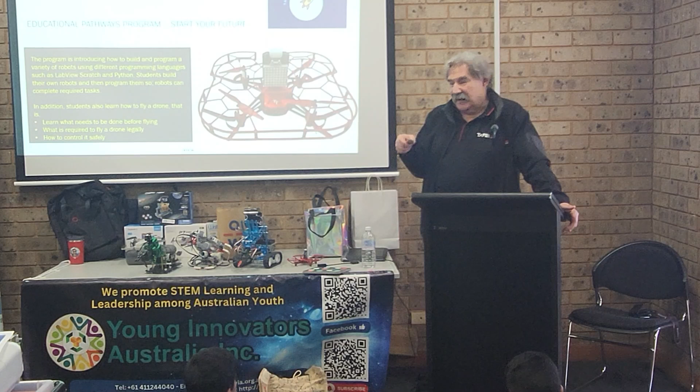You have to remember that if you want to fly a drone, you have to do that in a safe way. To fly a drone outside a safe area, you have to be 15 years old or older. But before that, you can fly a drone in a locked room where it is not possible to do any kind of harm to other people. So please remember, that is what is indicated there.

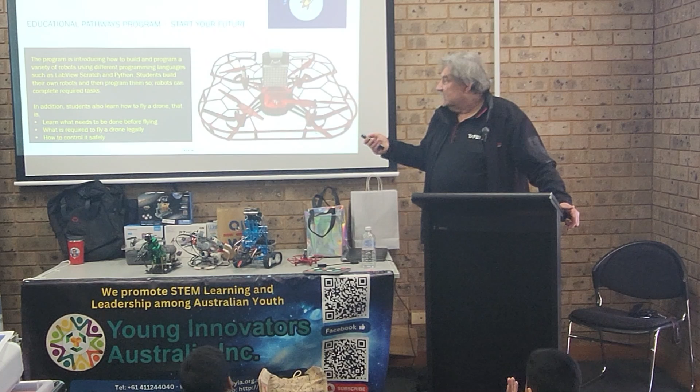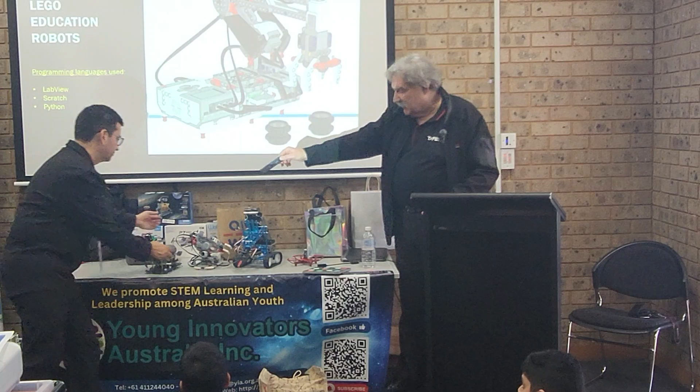Okay, so now let's look at the robots. You remember that one, yes? So we've got that one. Students were building, well, at this stage our program started 3 weeks ago, so all these robots which we've got here are still not completed because students are building them. At this stage it is kind of advanced, so you can see it's a bit of work. Students like Nora put them there, you can look and feel them later.

But you saw the building process is the same, only you need to spend extra time. That's why we have longer programs. So once students are completing building, they will program that.

We asked, what is this? A grabber, it looks like a crane. Yes, so this building is like an arm which is picking up the logs and things like that. So all of them are doing exactly the same thing, but there are different technologies.

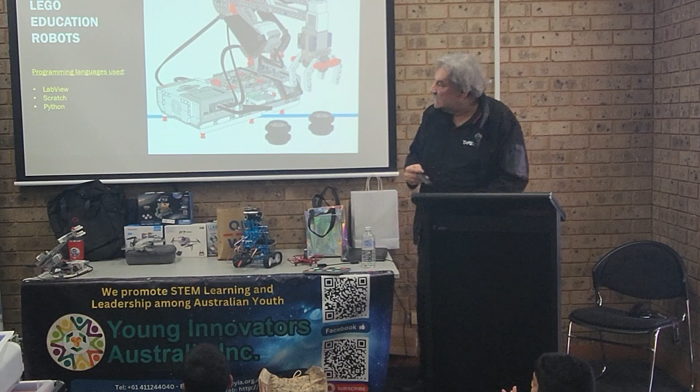If you look in a corner, we'll come to that in a moment, you can see the programming languages. At this stage, you are using LabVIEW, so you are using blocks and putting them together.

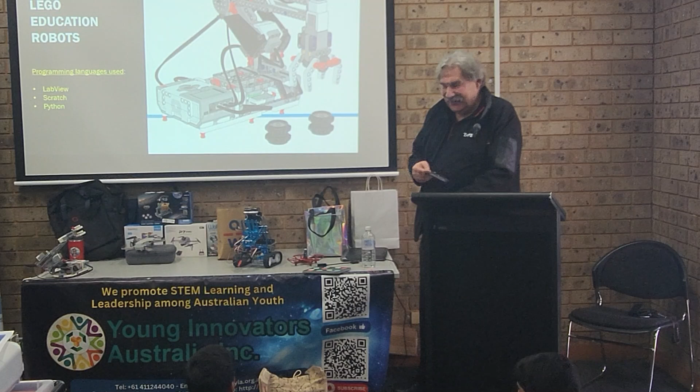Now, do you also use Scratch? Yes. So you are already very advanced, already on the second one. Scratch is something you can use with those devices, so this one and that one can be programmed with Scratch. If you are not using LabVIEW, Scratch is the next best thing because you've got pictures, you put them next to each other, and then you change the numbers.

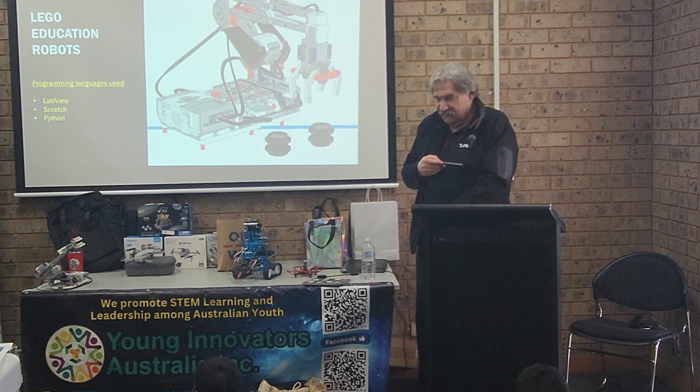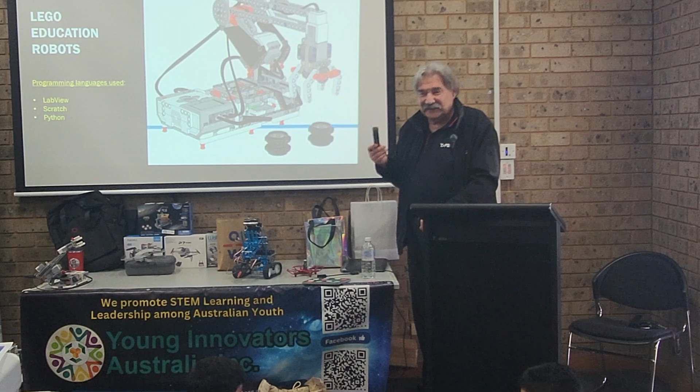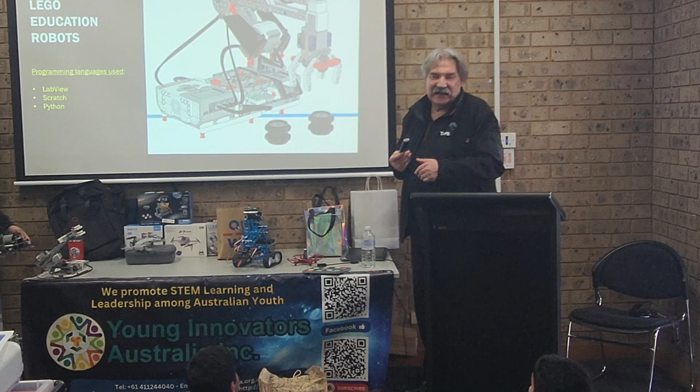And when you finish your programming, does it work always correctly? No, the programming is terrible. You always have to think what to do with it. So please remember, regardless of what programming language you are using, you think everything is perfect and will work, but then it turns out it's not actually working. The process is the same: you program, you try, you test, and then hopefully it works at some stage. The more you do this kind of work, the better the results, and you'll learn faster if you've got a background in that area.

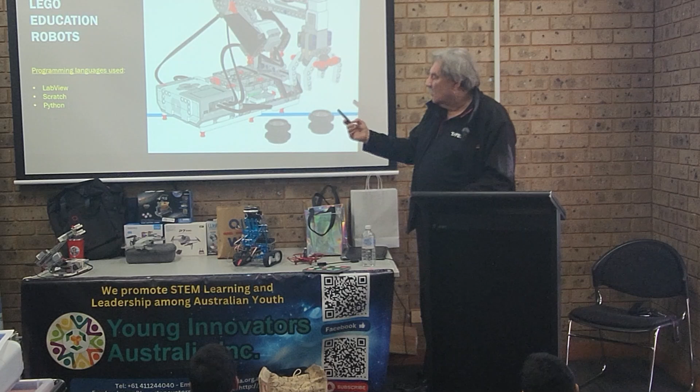Okay, so that's this one which we've got here. Our students are starting with this one, and then they go to the next one. When they finish, they go to that one.

Did you use a laser as well? Sorry, if you want to use a laser pointer, yes. Did you use that one as well?

Did you build that robot? No, not yet. Oh, you will, that's why he's just waiting for you. You will see that, that is a bit more advanced.

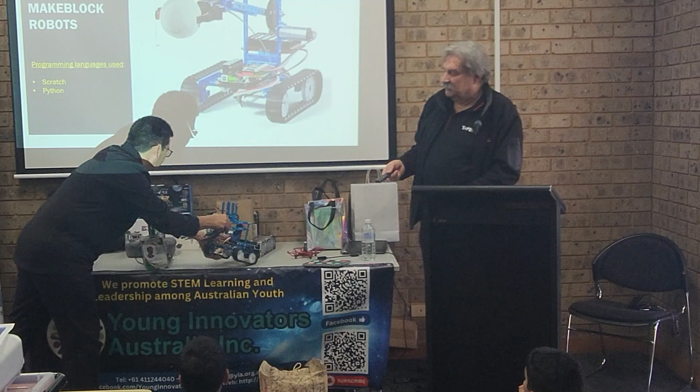I noticed that you've got one in the corner there, but that is the next robot, which is built by the students, by the way. Their prizes, the winners will get those, so that's the prizes. In this case, you can actually have one today. So that is the result of what students are building.

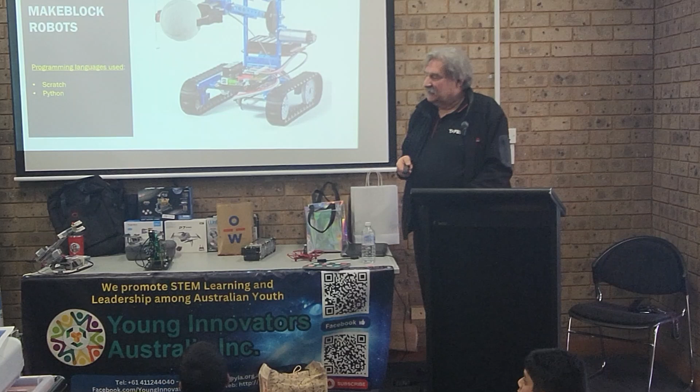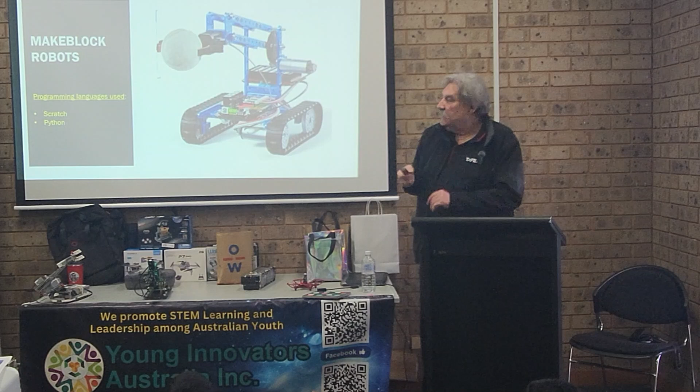So again, it is like a crane, it's got an arm, it is a robotic arm. This robotic arm can do a lot of interesting things. But please remember, that one was also a robotic arm from Lego. This one is a new technology, and it is also a sort of robotic arm.

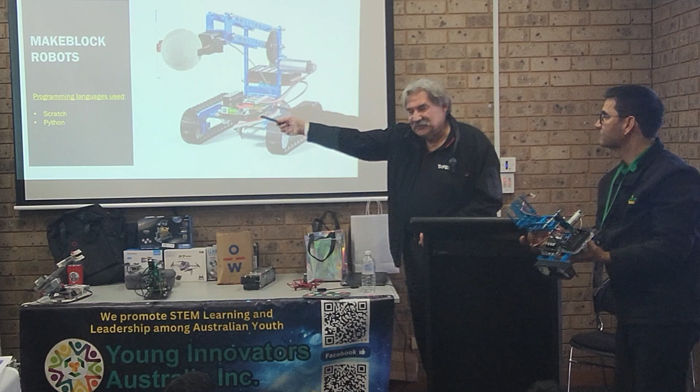Now, if you look at the programming language, you are ready to work with that one as well because you know Scratch. Yes, we know Scratch. So in this case, you can go to that one and program that as well. It is a bit harder to build, but that's something you also have to learn, something a bit more advanced.

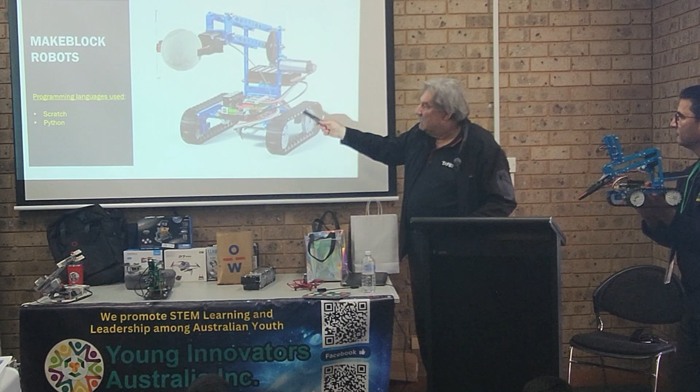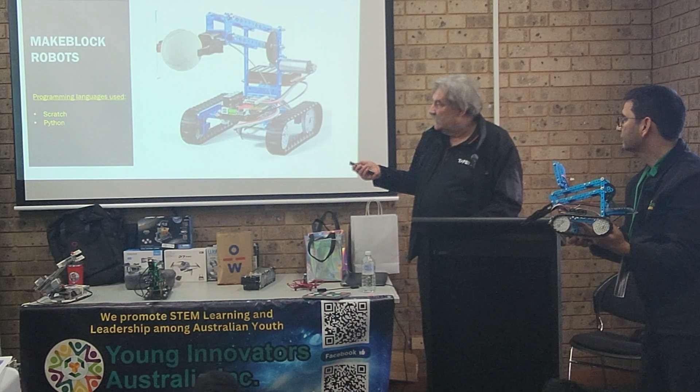More like a Mars rover, these kind of trenches and all. Yes, so you still have to learn how to build them, but you also have to learn how to program them. Exciting. So this one is more advanced, and that is what our students are doing after finishing with the Lego one. So they go to the next one, and the next one is this one.

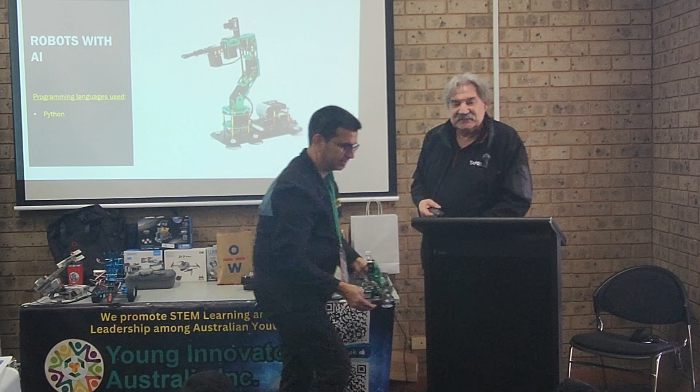But this one, you still have to build, but this one is smart. That robot is actually learning as well. So when you program that, the robot is actually memorizing everything. Do you know what AI stands for? Artificial intelligence. Great, very good, artificial intelligence. So what does that mean? What is a robot with artificial intelligence able to do?

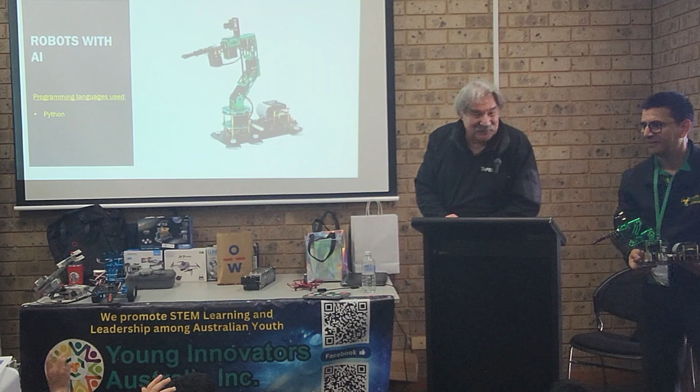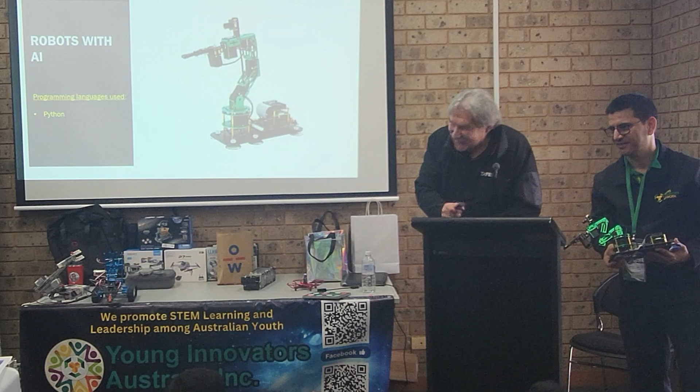Anything? Yes, we hope that will be anything. It is able to learn while it's creating stuff and do things. Exactly, evolving with humans. Yes, spot on, we will have to have a prize for that. Okay, we'll do that, he's already getting one.

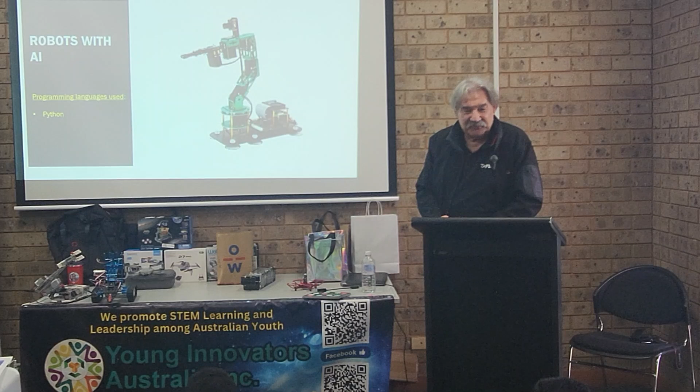So this robot is very smart. You will teach this robot to do something, and the robot will know straight away. This robot is also able to learn what you mean by moving hands, making gestures. This robot is actually learning everything. So if you do something wrong, the robot will tell you. Yes, the robot is actually very capable.

So this one is much more advanced, and if you want to program this robot, you have to use a programming language called Python. Do you know what Python is? Yeah. You have to write what the robot does. Yes, that's right. But what's the difference between Scratch and Python? I think you have to type the code, and Scratch is block building.

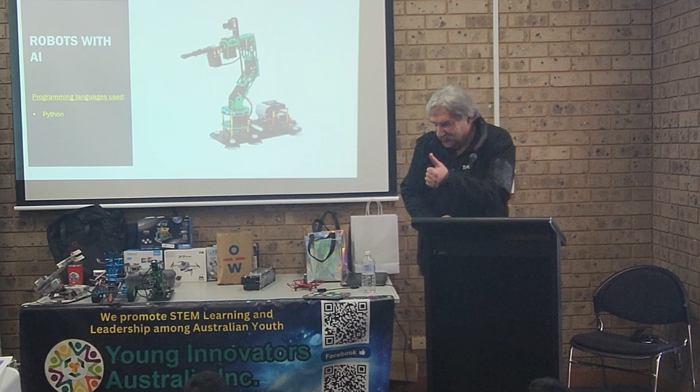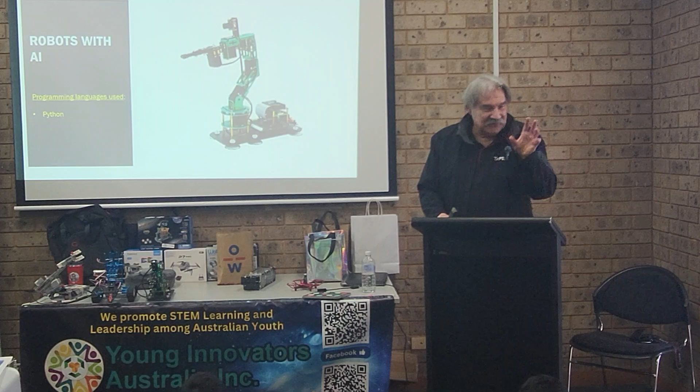Very good. Yes, so in Scratch, you use blocks, and these blocks are already predefined, and they will help you with your learning. But in Python, you have to write everything by yourself. Yes, as you said, you have to actually type everything by yourself.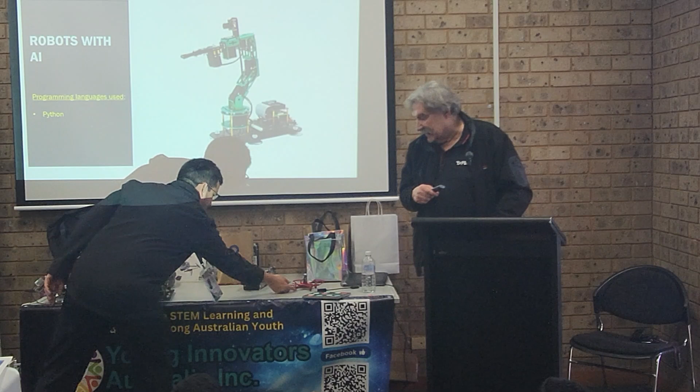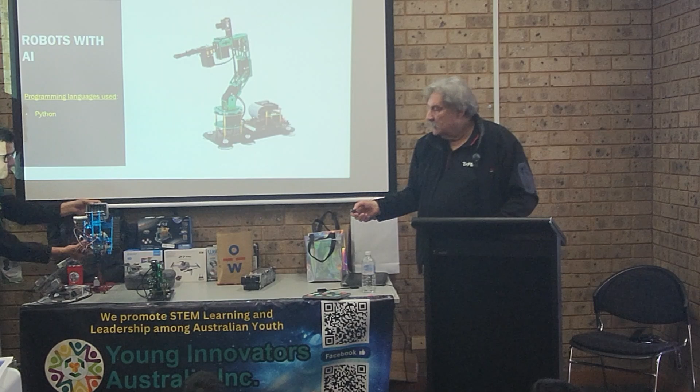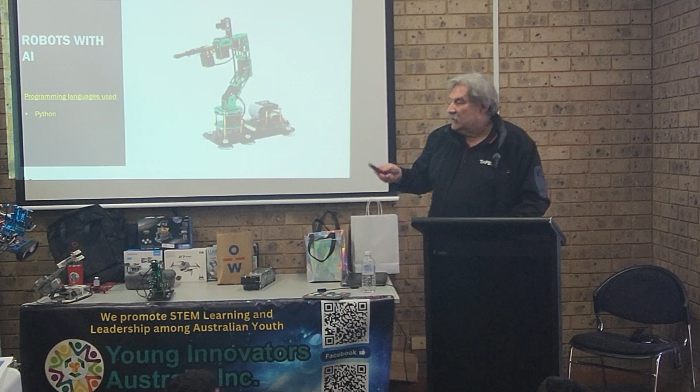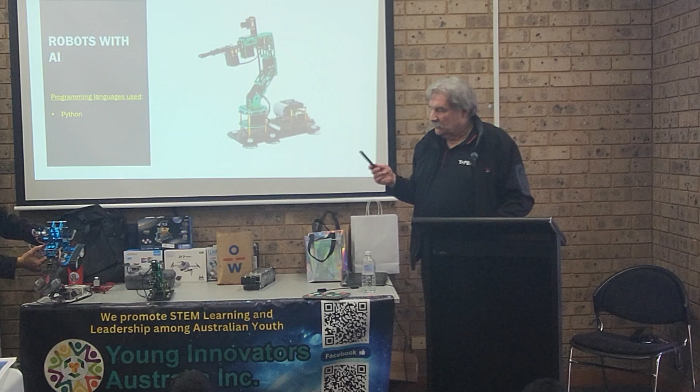Now, please remember that when you are using this blue one, the blue robot, this one which we had before, or we can look at that here, the program that you will be using, you can create that in Scratch, and you press a button, and that will convert automatically into Python. So in this case, you will learn very quickly about Python if you are using this blue one, because it will help you switch to Python.

Well, okay, so now I wanted you to remember that each of them is actually doing the same thing. It is a robotic arm. Yes, but now you can see that you are learning.

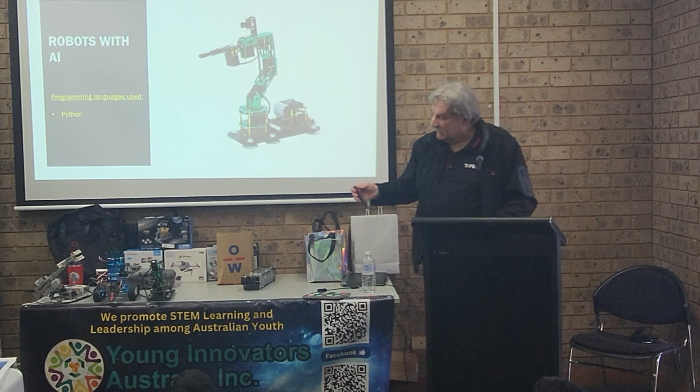And what's the purpose of that? What's the final result of that? Well, it is this. And that is what's happening, that is in real life. And to actually program that, you can see it's exactly the same robotic arm, but it's actually a worker in an organization. And these days, those workers are everywhere, moving in different ways.

So someone has to program them. That is why you are learning that, because when you finish, you will go to work, and you will be programming them. You will be checking whether they're working correctly, whether you need to make some changes, because as a programmer, you know you could make mistakes, yes? And what will happen if you make a mistake?

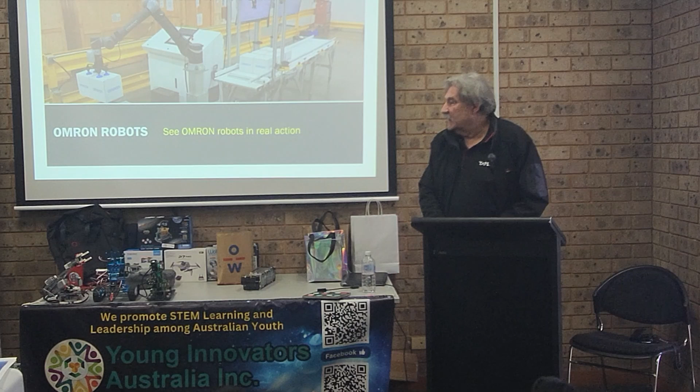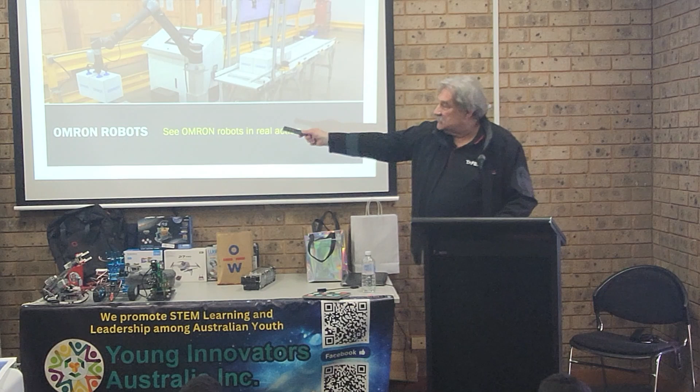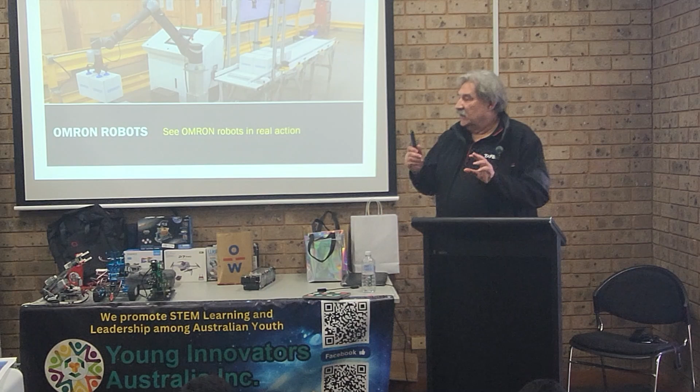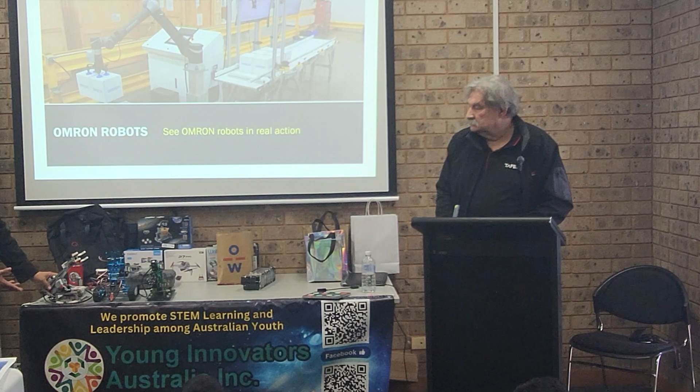Yes, it's very important because today you will learn, tomorrow you will do. Even the old engineers, they don't build an arm like this, they start like this. When this works, then they think about it, because they can't take a risk and make like this, and if it doesn't work, we are all in trouble. So they start small. What you learn today is where the engineers start too. Yes, so now you can see your path, how you started from Lego and end up here working as a programmer, programming robots.

Now, I also mentioned that you may be programming drones as well. So this drone which you can see is programmable. You can program this drone using either Scratch or Python. Now you can see that here you have got the pads.

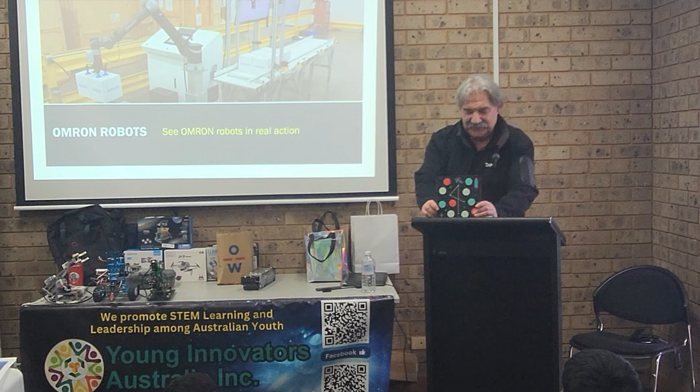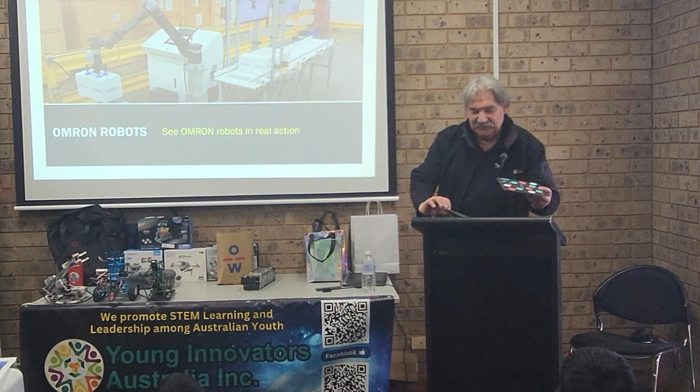How do you see? And do you see that they are different? Yes, and that is what the robot, the drone, is able to recognize. So when it sees a specific pad, you can assign an action. So if you see this pad, you will say keep away from that, and if you see this pad, you can say land on it.

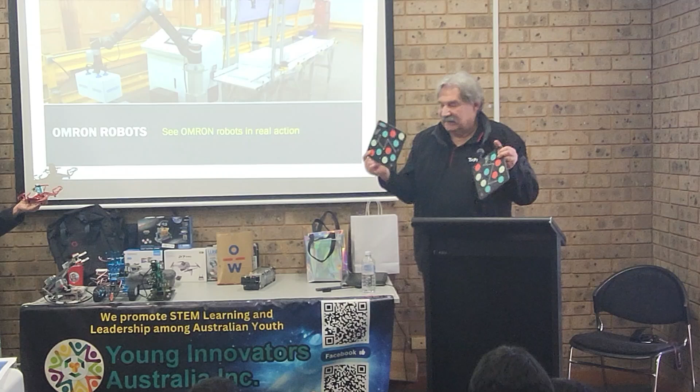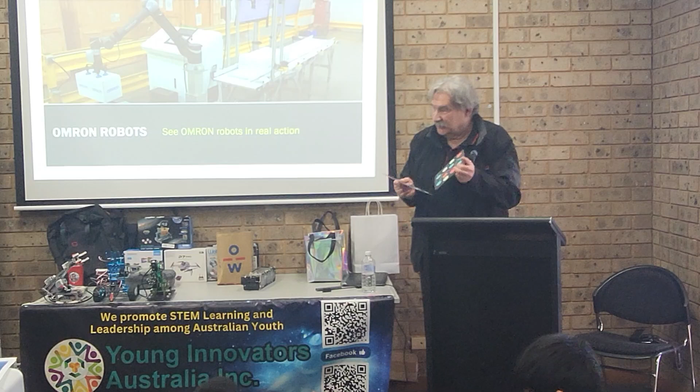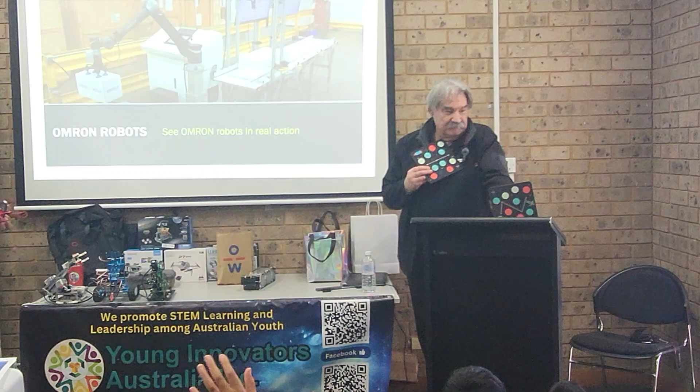So please remember, these pads are designed to give the robot an indication of what action it's supposed to take, or what action you will assign to it. It's got a camera which checks what is below it. So you put the pads, and one pad could be, for example, fire. So if the drone sees fire, what is it supposed to do? Go away, stay away, fly away. Yes, fly away, or something better. Stop the fire? No.

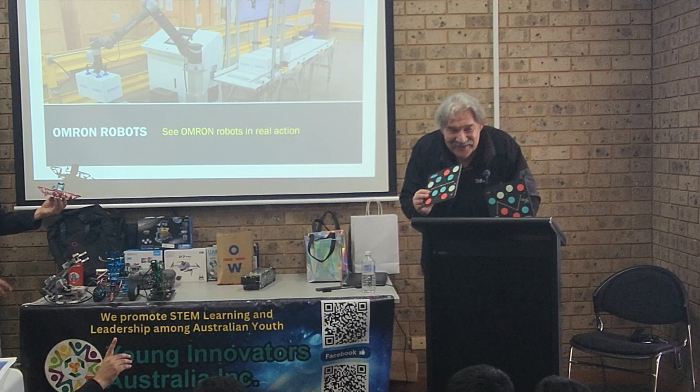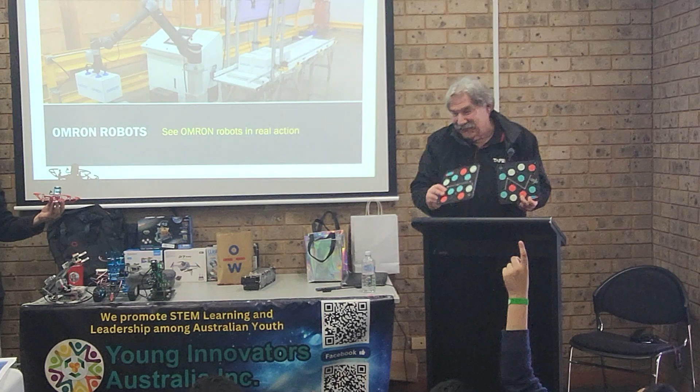Yes, extinguish it - well, if it's got water, but if it hasn't, maybe find the source of water and bring it to the fire. That's a very good idea. But the robot may not be capable because it's very small.

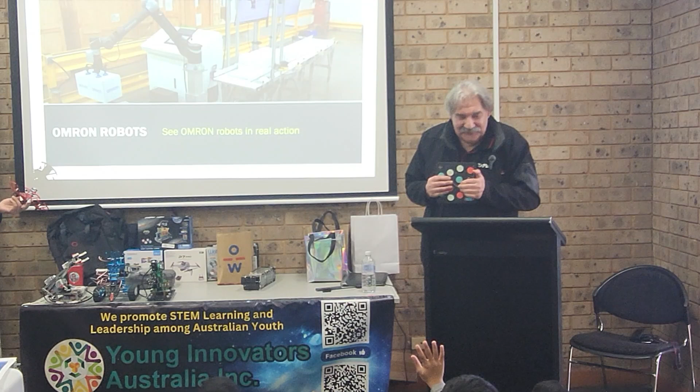Yes, that's right, it can signal - you can send a signal. Do you know when you've got a danger and you are at risk, what do you call? 000. So you can program a robot to call 000 and say fire.

In this case, that is what we are using these pads for - to tell your teachers if any of you are not working in class or sleeping, it's gonna drop water on your head. So you can use them for many different purposes.

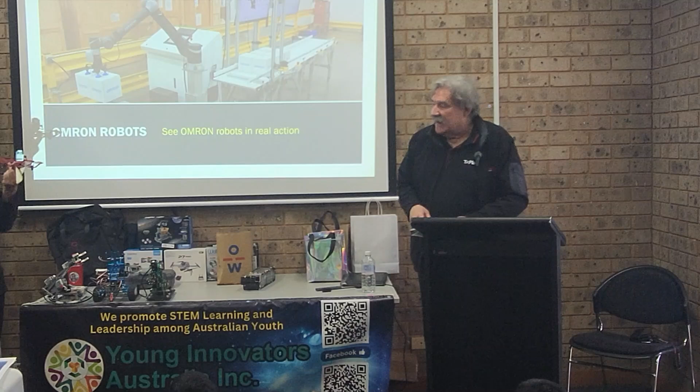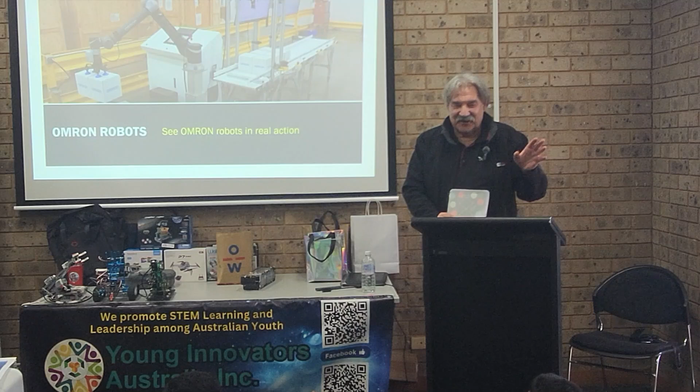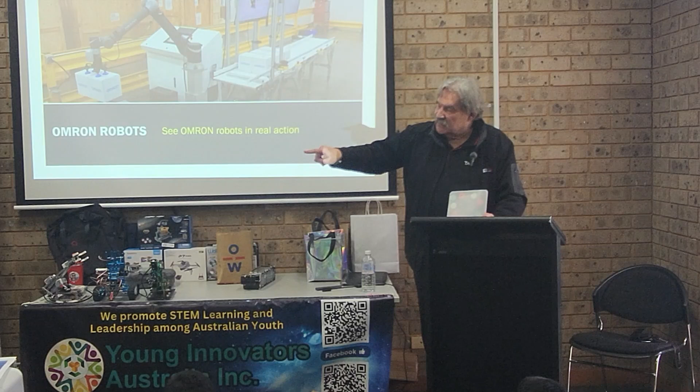On the top of this drone, you can see it's got LED lights. When you switch that on, it's actually blinking flashy lights. Did you see light shows created by drones? Yes, that is what this drone is capable to do - you can program them, set up the lights on it in different ways.

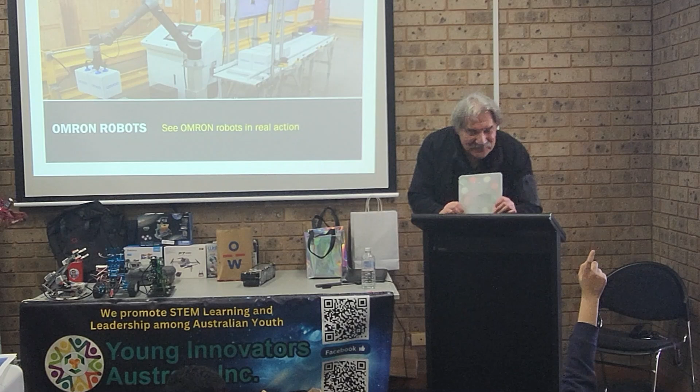No, it hasn't got a battery, that is why. It's okay, you can - I'm also just taking a chance - you can also use the LEDs to make different symbols to tell people if it saw something. Absolutely, very good, yes.

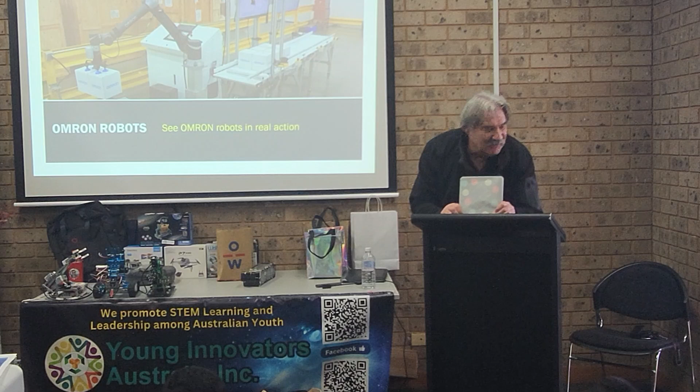Yeah, this is a new possibility. We also have - yes, let me show you - we are working with university students on making a shepherd dog drone, which will go in farms. If they see anyone missing or hurt, they report back to the owner, because farms are big. Yes, we're working on it.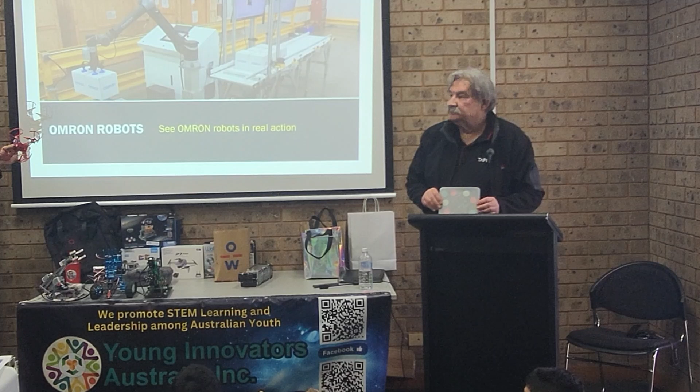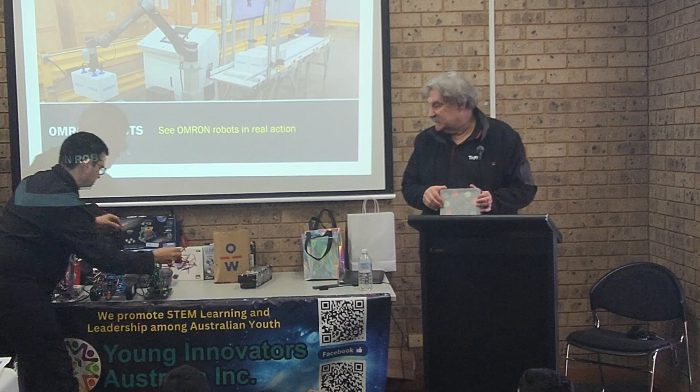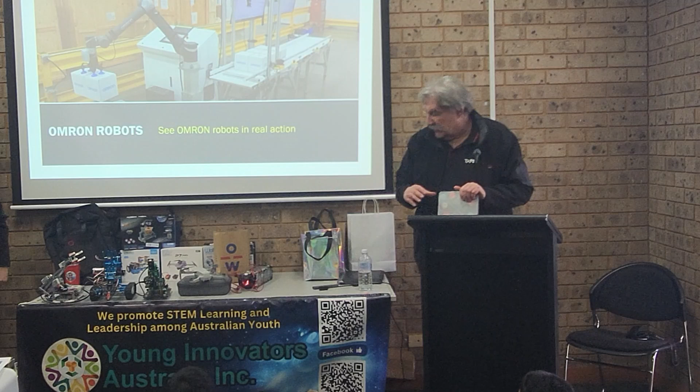So now you've probably heard about drones, how they are used for many different purposes. The programming you do for robots is exactly the same programming you do for drones. You can program this one with Python, or as I mentioned, you can use Scratch as well.

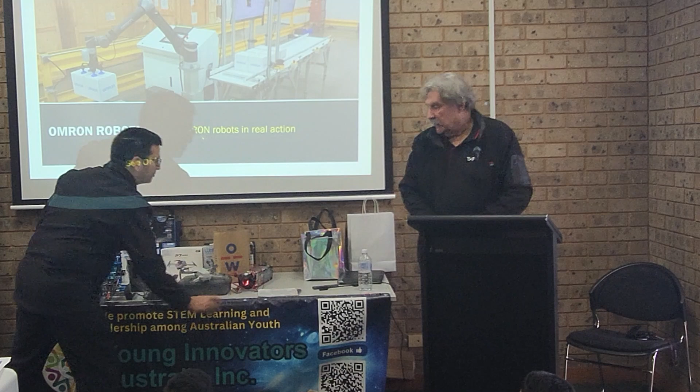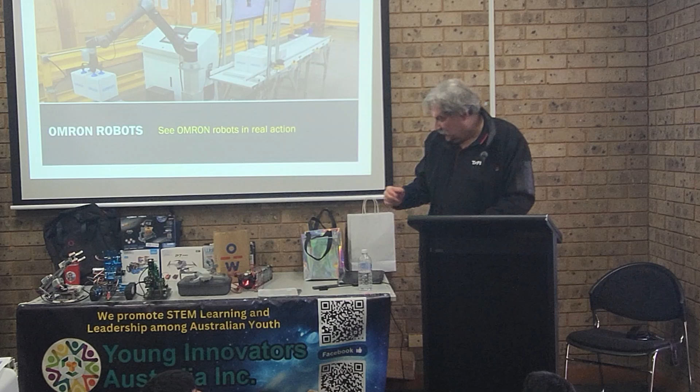Okay, so that is my brief view of robots. As I mentioned, I am really very happy to see you that excited about drones and robots, and hopefully the next step you will do will be something that maybe you will end up in my classes.

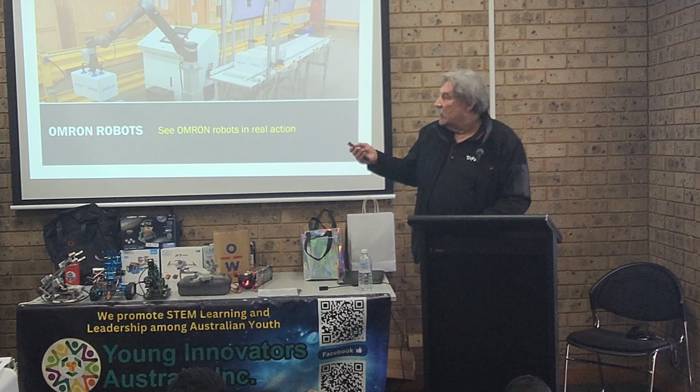Now, for students who are older, this program is already open. Every school is actually providing this program, so that is what we are teaching. Whoever is 15 years old or older can sign up. You can learn everything I just covered in my presentation, and you can also make it a subject in HSC - TVET, they call it - the program where you stay in school but go to TAFE to learn the technology.

Yes, so this program is short, only 8 weeks, and it is for students who are 15 years or older. It is called EPP, which is short for Educational Pathways Program. So for people interested in robots, you can join when you are 15 or older. That's important, because otherwise you won't get a license for a drone.

Okay guys, so as I mentioned, that's all I wanted to present to you. It's great to see you that excited about drones, and I hope you will stay with that, because it's an exciting world.